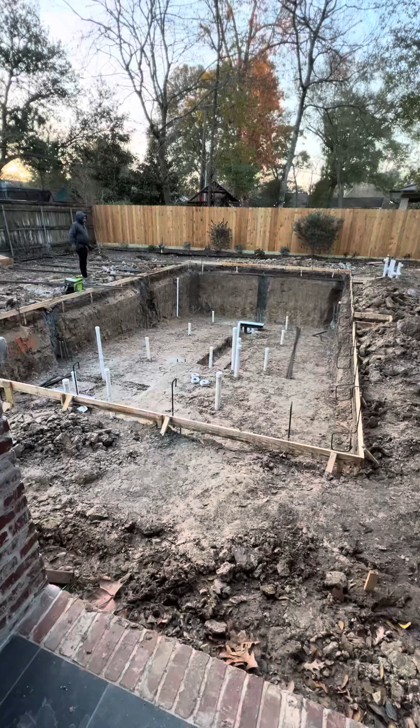So we are out here this morning meeting our steel crew, and basically they're starting to hang stirrups right now. Get everything set up to get all the rebar put in. We have an inspection at 1 o'clock today.

I'll get to the steel guys in a minute. All these pipes you see sticking up inside the footprint of the pool here are what's called an in-floor system. So in an in-floor system, you don't have a little pool cleaner that runs around the bottom of your pool. Basically you have these little pop-up spray heads, kind of like a sprinkler head.

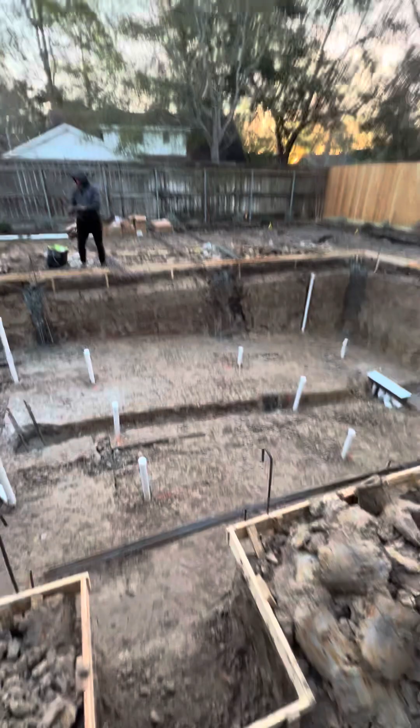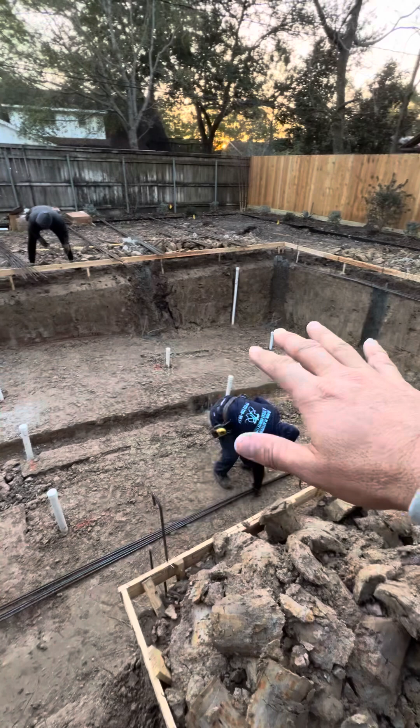Basically what that does is it comes on here, washes everything off the sun shelf, comes on there, washes everything off the steps, comes on here, washes everything off the benches, and then washes everything down till you get to the bottom where the drain's at. It washes into the drain and gets sucked into this leaf vac, and you can use it just like a skimmer. You just pull all the garbage out of it, and that's what's called an in-floor system.

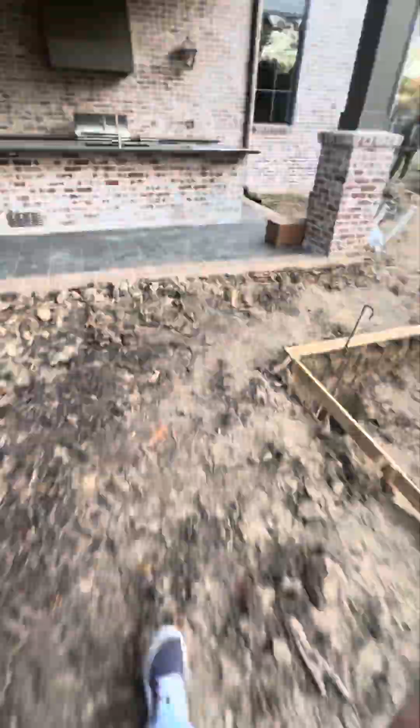So when we run through and we're going to do an in-floor system, we have a layout to follow, so we know exactly where each spray head's supposed to be, all the specifications for all that, and that's all on site, so we can make sure the plumber knows where all of his pipes need to stub up.

So they come and do what's called a pre-plumb. After we get the hole dug and get the outer form up, the plumber comes in and puts in all of his piping that he needs to put in before the rebar goes in. Then after the rebar goes in, he'll be able to come and hang his skimmers from actual steel rebar that's on the side, and then we're able to shoot gunite after that.

So he'll have to plumb the spa and all that, then we can shoot gunite. We've got an inspection scheduled for 1, and then our plumber will be back out to finish up everything he needs to do. And then we have gunite scheduled for tomorrow.

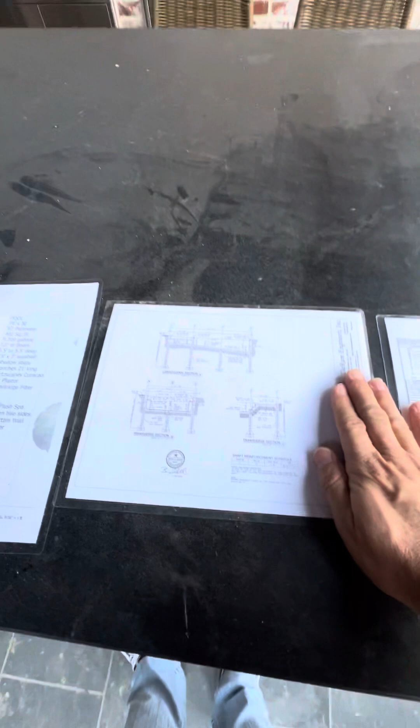So when you're doing rebar on the pool, basically you'll have, this is our pier layout. This just goes over everything to do with the piers, specifications for the piers, and then everything's just detailed on what we're going to do here.

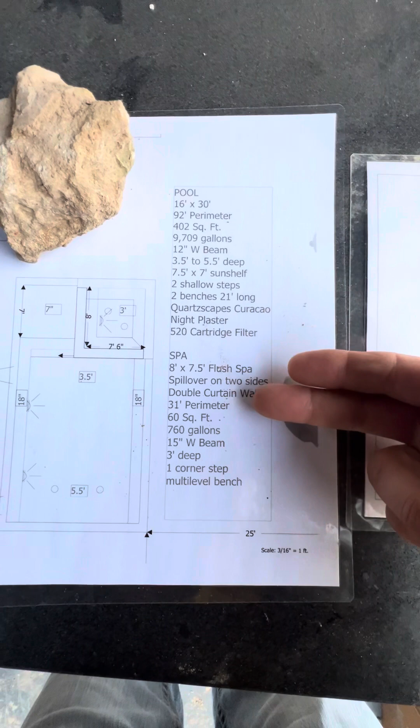This is a double spillover spa, so we need to have a double curtain wall. In an L shape right here on the spa, it'll be a double curtain wall because you have to shoot gunite on both sides. So we got a lot going on.

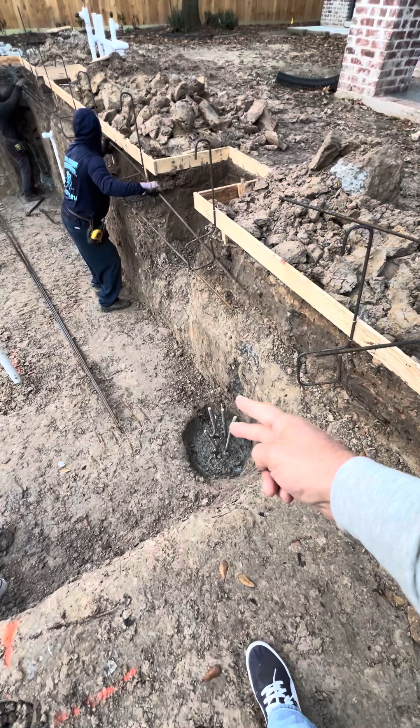I'll drop down and show you what the piers look like. So this is piers 1, 2, 3, 4, 5, 6, 7, 8, 9, 10, 11, 12 piers. When they start hanging the steel on the floor, 2 of these pieces of steel get strapped into the sidewall, and 2 go into the floor, and then those 4 all go into the floor. We have an extra beam going down the center here for this particular pool, and then all those piers will get tied in.

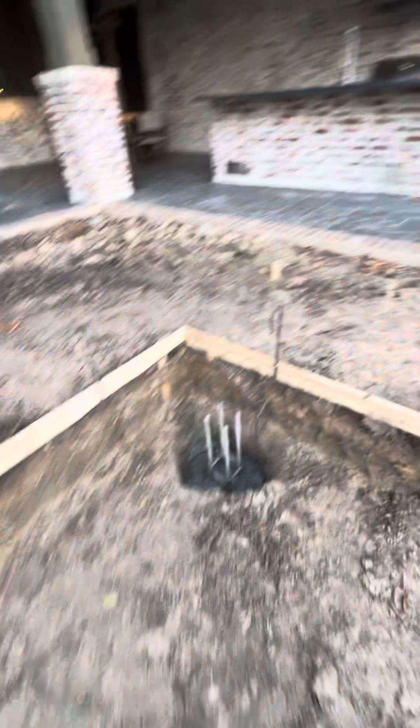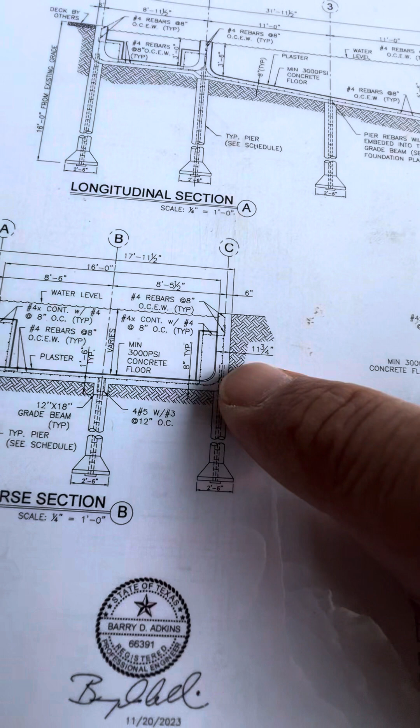Those piers are on bell bottoms, so basically they dig the hole, and then they have a special piece of equipment that will flare out on the bottom, and then we make special rebar cages for those piers. We drop the rebar into the hole, pour concrete into that hole, and then it cures, and a little bit of rebar is left sticking up out of the ground, just like you see over there in that corner.

So long video, sorry about the long video, but just wanted to give you guys a glimpse into a pool build.